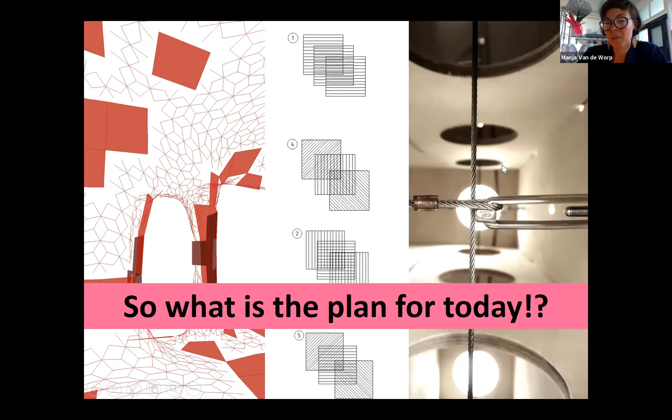I want to really talk about the importance to learn from others and to bring different people together and talk about this collective knowledge. What I'm going to do as well, I'm going to put my timer because otherwise it might last a bit too long. So I'm giving myself 12 minutes for this introduction. And most of you know as well that I miss timers. So now here we go to myself as well.

So this kind of horizontal learning strategy, I find it super fascinating, because vertical learning, as it says here, experiences are cases where a learner makes a lot of incremental progress on a scale from low to high skills, as if moving up a ladder.

So that is kind of the typical learning. You learn a skill, then you improve it, you go to the next phase and the next phase, etc. But then horizontal learning is a bit more like Mario Brothers. You have ladders that go up and down, and you need to actually use all of them and kind of still keep looking sideways.

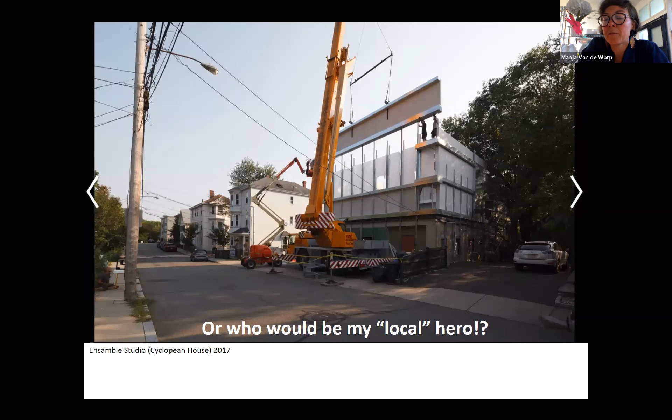So horizontal learning is much more about exploring what these ladders look like and where they can bring you. Horizontal experiences look a little bit like mucking around, and I will show some stuff of that as well. But really they are ways of getting your feet wet, getting used to the water, and getting ready eventually to jump in and go swimming. I really like this idea of thinking, and I also think that is how I work and collaborate, hopefully with everyone around me. So let's see what the collaborators, the secret guests, will have to say to that in a bit.

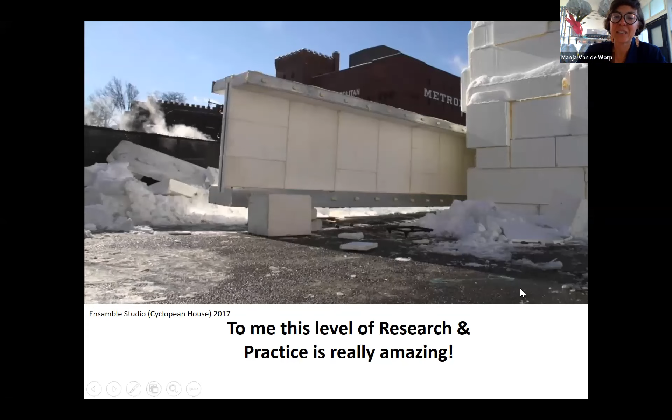So a bit more about me, very simple. Yes, I do structural design, geometry and fabrication, and that has been my passion, since studying in Eindhoven in the Netherlands, where I graduated as an architect and an engineer. But then I also love making and breaking. I like to share crazy ideas and collaborate. And I also like to define a new lightness, which I've called Rubens. And I always challenge optimization.

Then indeed, I teach, or have taught, at AA and Bartlett. At the moment I am teaching at RCA, where I lead the technical studies department for the MA architecture program. And of course at IAAC.

Yeah, indeed, a bit of history. So yes, I used to work for Arup, which was the best breeding school to work with crazy architects, doing really experimental projects. I worked in AGU, Advanced Geometry Unit, and the AT&R, Advanced Technology and Research Department. And then indeed I set up NOUS Engineering London, which is now called YIP. So YIP pretty much stands for 'yes, it's possible,' which is my ultimate attitude to treat all projects.

So what is the plan for today? These are the images that I shared, and these are kind of small snapshots of the stuff that we are going to look at today with these three special guests. But before, I want to introduce a little bit more about what I was thinking about for today.

Because indeed, when Areti was saying, yeah, this is Zoom, we can talk with some cool people, here you see that now we could have all of these amazing architects that we can discuss with, from all over the world. So I was thinking, okay, who shall I actually invite?

Obviously, maybe some of you recognize here Gilles Retsin, who I also collaborate with. This is a kind of fun image of one of our Zoom calls, because we are working on two projects together again at the moment. But that is a bit too close to home.

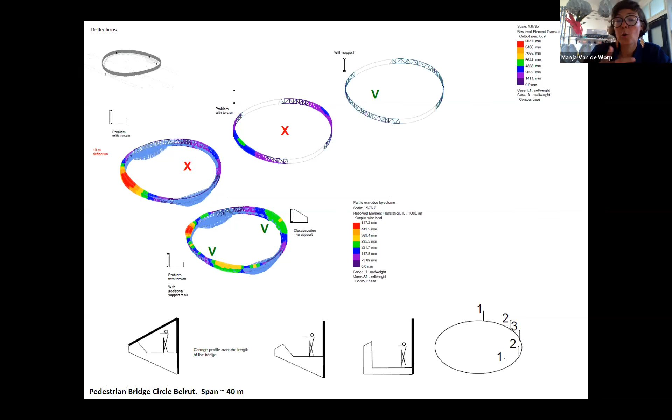Then I thought, okay, why not maybe put someone more local? So this is an image of the Cyclopean House by Ensemble Studio, which is also one of my favorites, because I really appreciate, as you see here in the next image, that they really combine research and practice. I think this is fantastic. I think all of us should get our hands dirty and actually experience at one-to-one scale, but also at prototyping scale, what it is that we are actually designing. And I'm sure that without having their backyard, starting to prototype some of these big I-beams, which you see here on the screen, they would have never just come up with that starting in Rhino. So I think that materials are really, really essential.

But I even wanted to go a bit more local to me and IAAC.

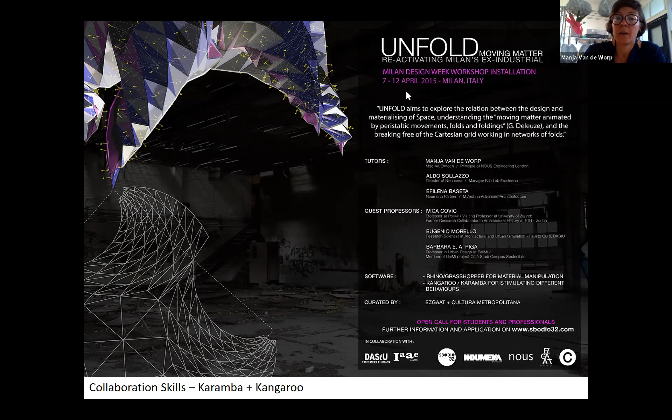I always forget how long it has been, 2013, my goodness. So for this evening, I have invited 3 special guests, my collaborators, to discuss some of our work. We will reveal some insights into 3 projects, all of which have a close link to IAAC. The original projects are funky in form, yet require some form of optimization. Maybe, let's see - food for thought for sure, and exploring a new collective design methodology.

So who are these 3 secret guests? Look, I'm always surprised by all these logos we see in the Google Docs. Oh, Anonymous Wolverine is also here - who is that, right? So you can dream a little bit more.

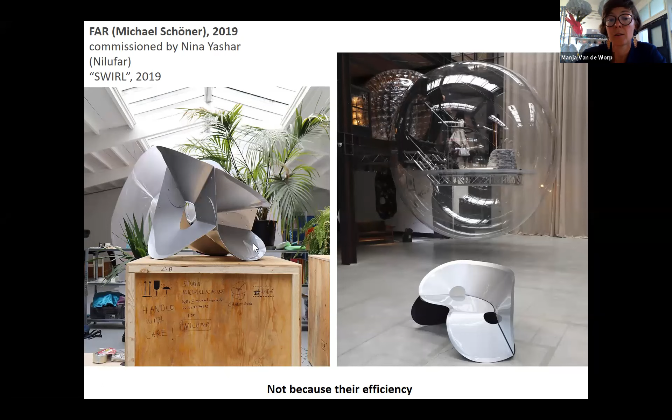I want to start with a bit about my history and this process from 2013 with me and IAAC, but more look at the spin-offs of these collaborations and where they've brought me. First of all, with Areti, I always see her at conferences, workshops around the world, and of course at the best parties.

The start was our road trip in Lebanon, where we were both invited to do a workshop in Beirut. We met together with Luis Fraguada, and the first collaboration started there to work with BAD. We were working together with Ali on this pedestrian bridge, this big circle. I called it a collaboration by mistake, but it was already a really cool collaboration, obviously.

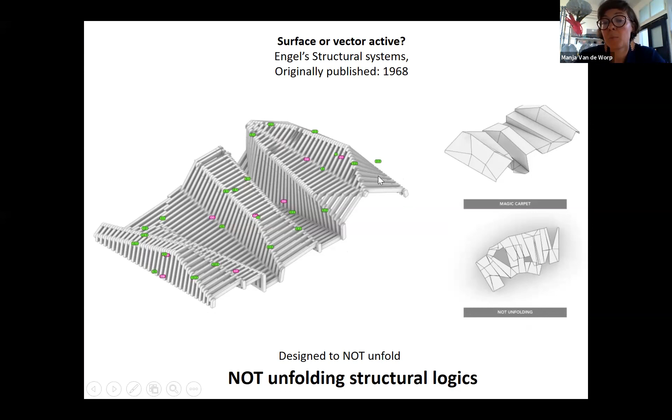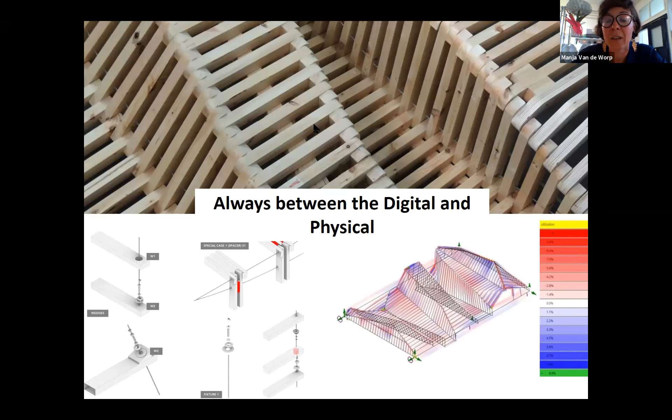Here you see some of the things we were looking at. In my work I use a lot of structural analysis, but it's important to think about how structurally we can actually change potential performance in an architectural way. Is it completely closed? Is it a shelter? Can it become a billboard? Where does the eye line of the person sit, etc.? I do a lot of sketching in Bluebeam, which is just a basic PDF editor, but it's really nice to explore these methods together.

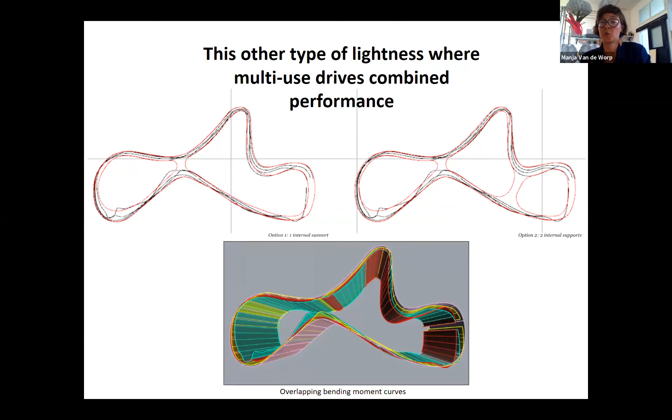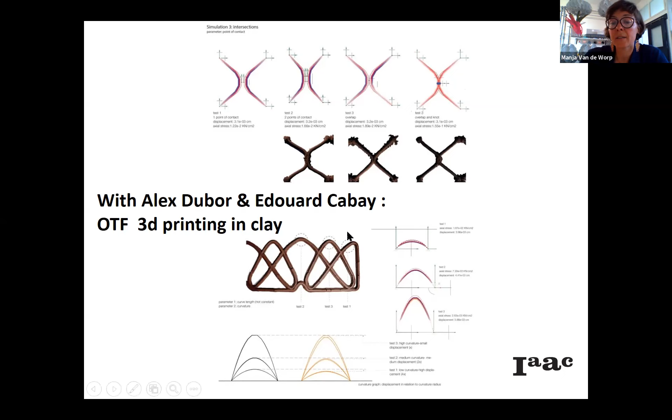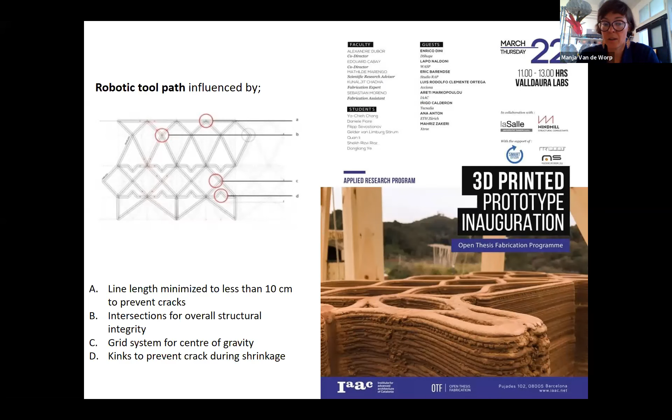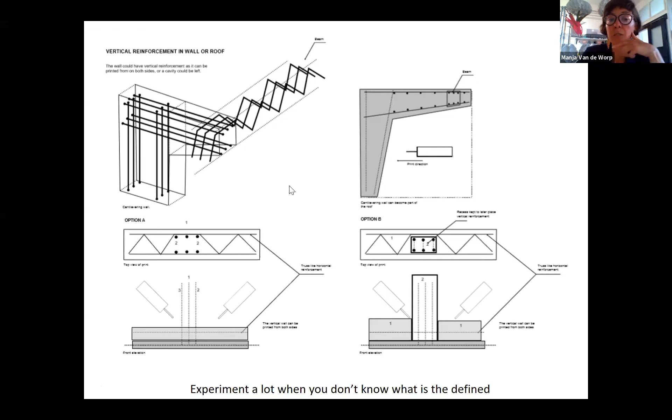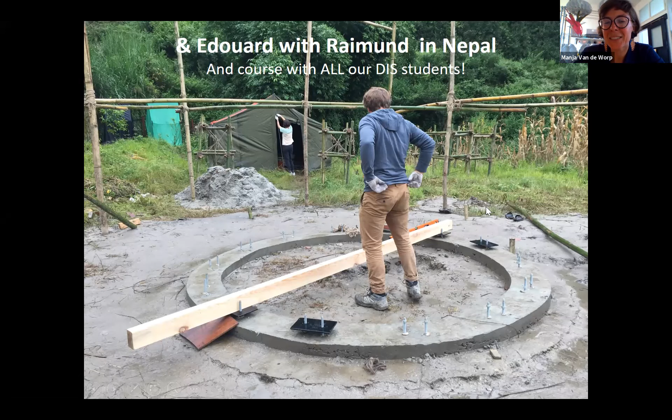What I asked the students was to think about different positions of how to use it, and they actually created an overlay of performances. So instead of optimizing for one specific point, they had to balance and challenge how the different positions would relate to geometry and stiffness within this product.

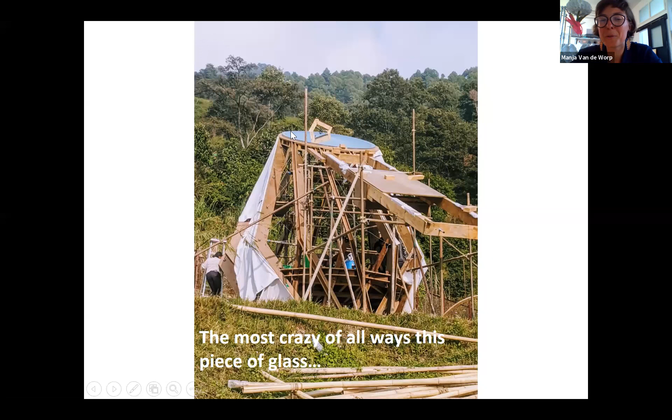Continuing on from that, a lot has come from my relationship with IAAC. I also helped Alex and Edouard with the OTF to think about 3D printing from a structural point of view. We looked at cracking, the curvature of the print, the drying and overlap, as well as testing the material in its wet condition versus its dry condition. The main output is to see how we could inform the robotic toolpath with the information we're getting.

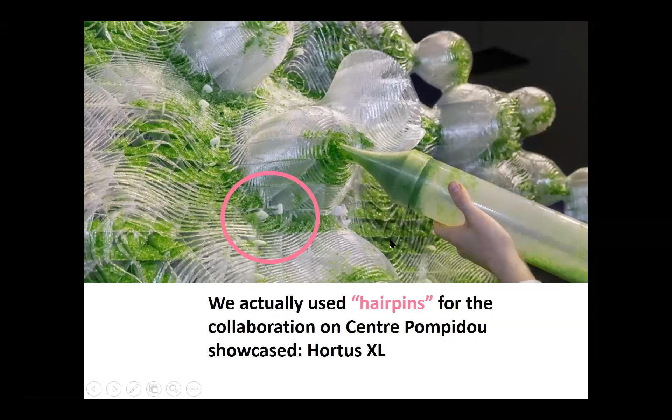And again, I don't know anything about 3D printing. I maybe can imagine what kind of material and structural principles are at play, and it's really about testing these different aspects together. I'll close quickly—I don't know exactly how many slides, but we'll get there.

What's important about this 3D printing work is that I continued with Rob Stewart-Smith, who is at the Autonomous Manufacturing Lab at UPenn, and tried to work with 3D printed concrete. What I think is important is not only the scale, but also that not everything has to be crazy or funky—it's about experimenting with things that aren't yet defined.

For example, we asked why does everything have to be printed—can we just make hollow sections? This is part of a cantilevering wall and beam intersection that would then be filled with concrete on site. It's about printing and casting horizontally, and how we can combine different techniques together. I'm always up for the challenge, but also really to extract and give knowledge, and to further our knowledge through these collaborations.

And of course, as Areti already mentioned, with Edouard and Raimund in Nepal, and all the students doing the Data Informed Structures course—again a bit of concrete, but the project itself is this 6.5 meter timber tower that we constructed. Amazing, and what a fantastic learning experience.

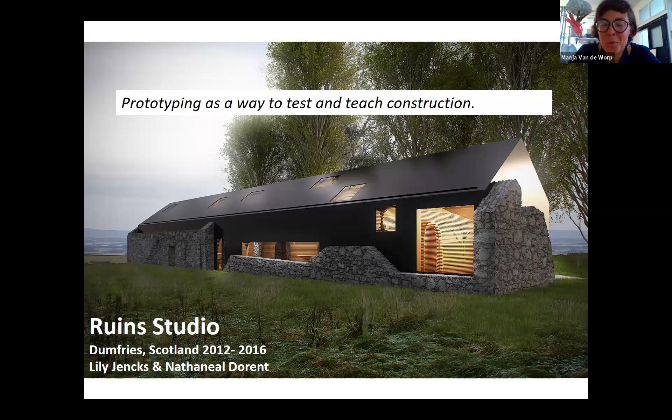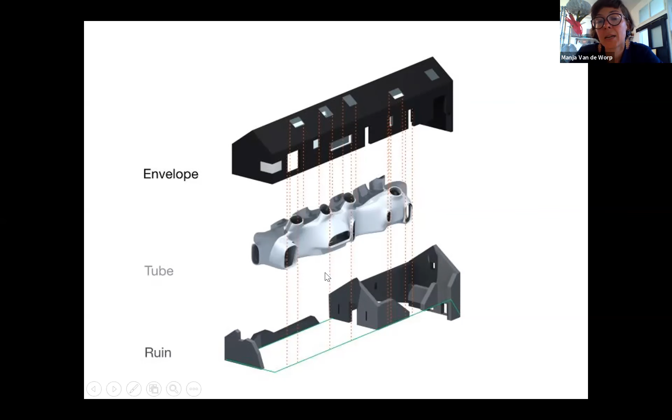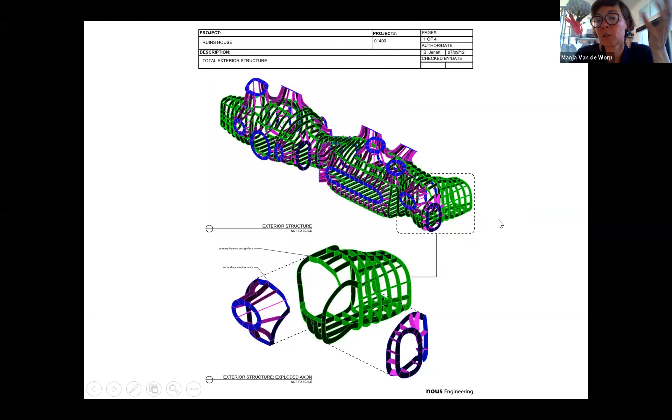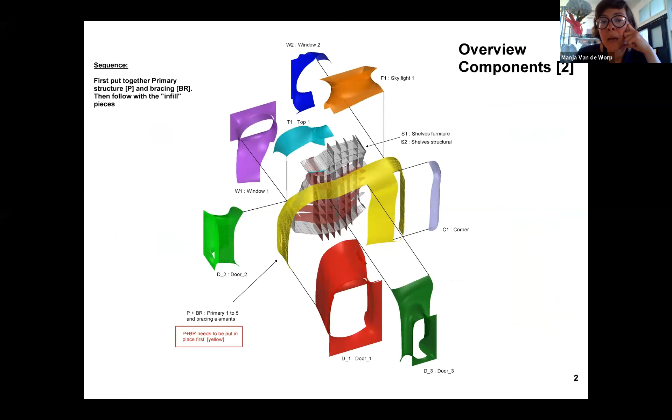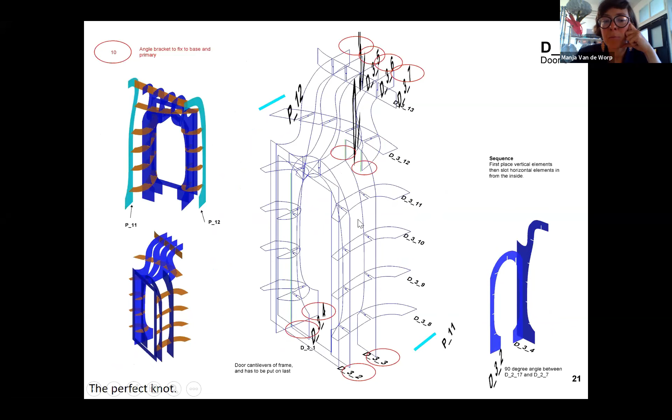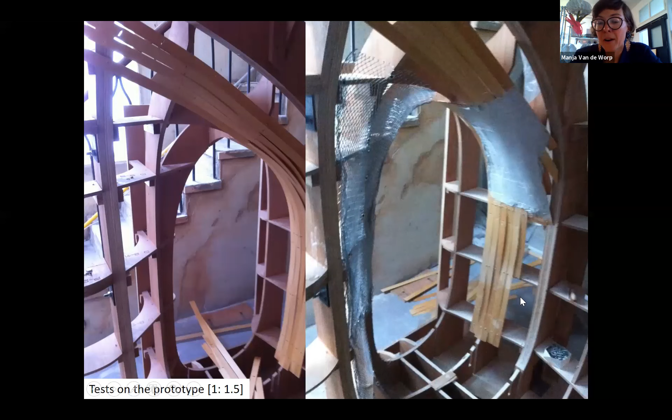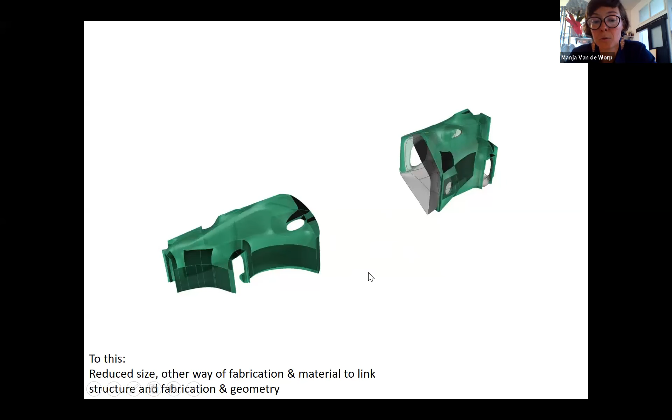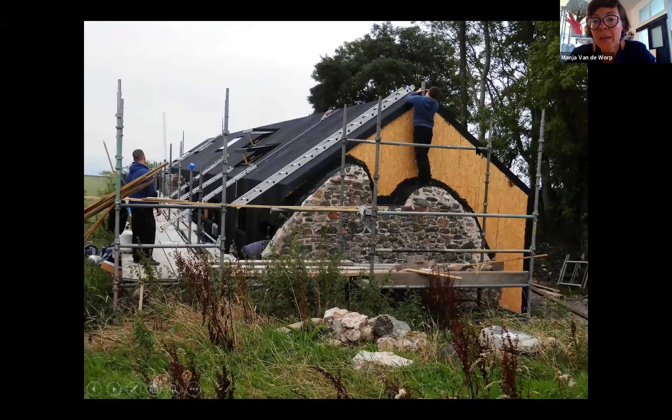What we're going to discuss a bit more today is this inner tube. We have the ruins here, which is the bottom layer - I'm not sure if you can see my mouse - and then we have an external envelope, and internally we have a structure that houses program inside, but also between the surface and the external part.

So here you see one of the first renderings that they made of this. This project started through collaboration with NOUS Engineering, and it came about because Matt's wife was a really good friend - or is a really good friend - with Lily. That's how we got this project.

Obviously, even as engineers, we use Rhino, as you know from me as well. But it's important to think about how the modeling we're using actually relates to a structural approach. And yeah, it looks pretty messy - all the geometries are super messy because they've been created in whatever software, there's no real rules to it. So how can we go about this?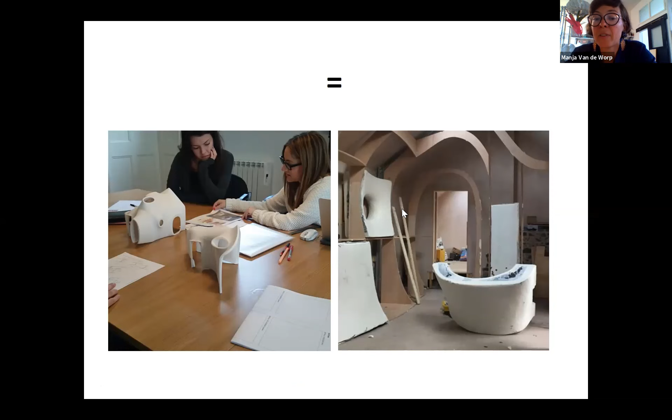Here are some more images of these, and again the main internal structure and how it was created.

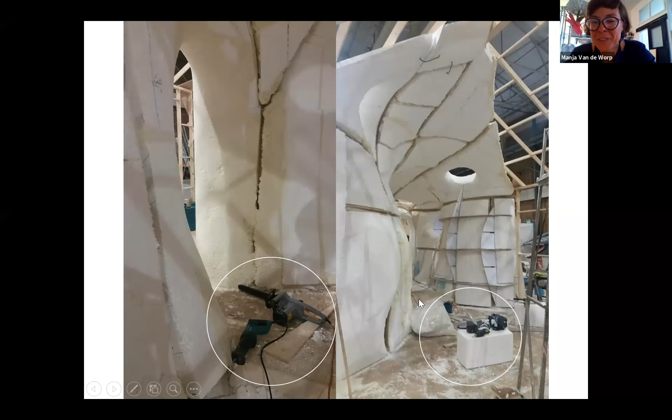But not only that, we made it very messy. We tried to think, okay, on this undefined geometry, how can we actually create some kind of cladding on this? So here you see some of this experimentation.

One more important aspect: in mid-2014, so imagine we're already two years in, we went from this continuous tube to this value-engineered version. All of a sudden we didn't have the full tube, we had to redefine the geometry, and the design had to change again.

So here you see another image of that, and here you see it during construction. You see the beautiful ruins and you see the external skin, and then internally will be the inner tube, as we called it. So this is what you see here.

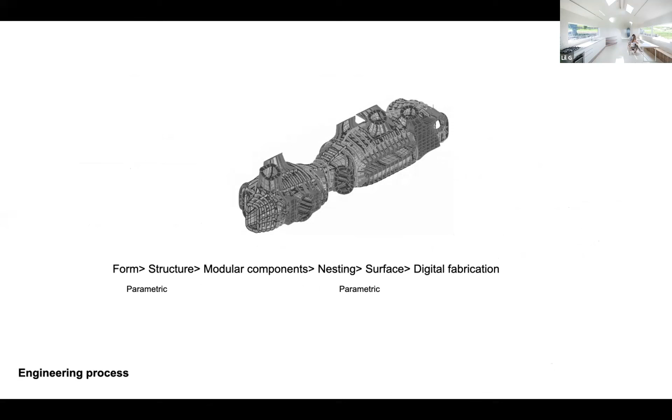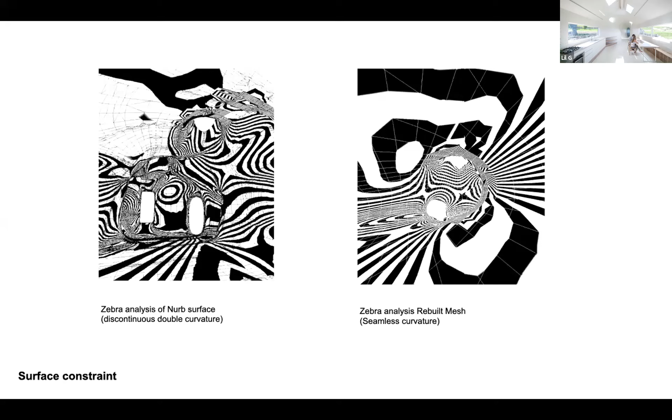So the timber structure was more like a placeholder that would then be rigidified by these infill pieces. And yes, so it used a hammer and a saw to cut and shape all of these beautiful curves here. And this is one more image from the inside, again during construction, because here the fiberglass reinforced plastic had to be dried - we didn't want any seams - and this is a heating gun changing it.

But let's hear a little bit from Lil G about what his interests were within this project. So I want to welcome Lil G to the floor.

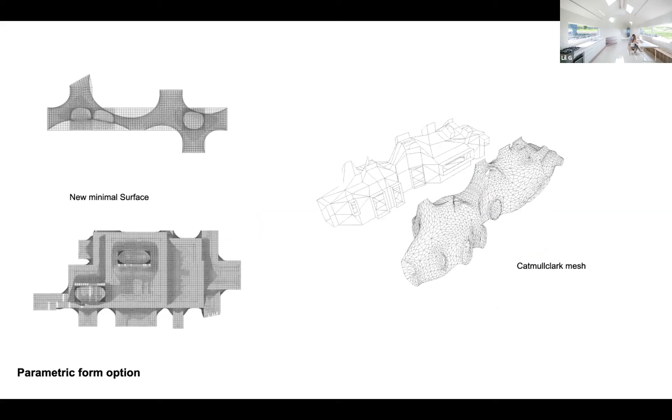I don't know how to do it, but I'm sure one person will be doing that right now, isn't it? I should stop sharing. Perfect, you've done it. And then Lil G, you can go. Hello? Hi. Hi. So, hello there.

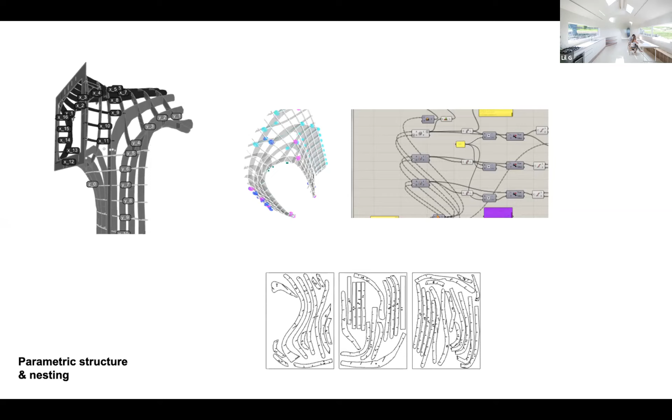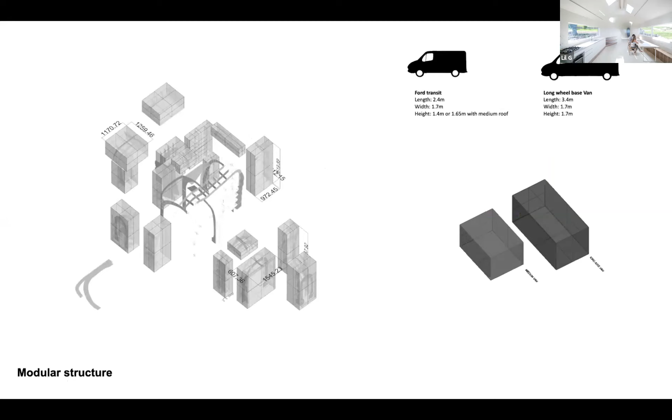We worked on this project about 7 years ago, and it was in a very remote area. So we wanted to work on this prefabricated structure. The fun thing about this project was the internal solutions rather than the external. So as Manja explained, I had this external envelope which was traditional due to restraints of planning, and we had this fun sort of organic form inside.

As collaborators, basically we wanted to redesign this form and structure and surface so that we could design this all parametrically, so that we could create easy flow for construction.

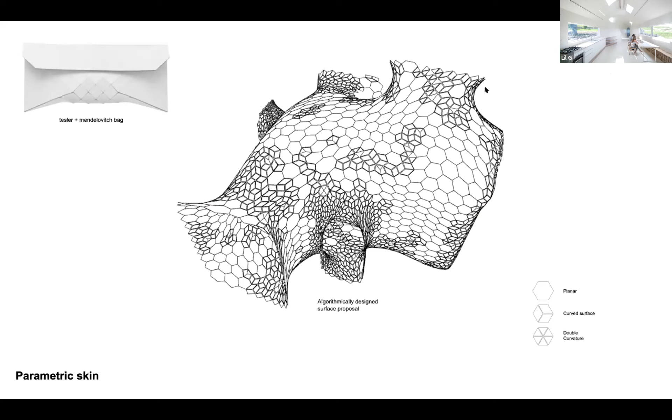Yeah, as Manja was explaining, at first we were giving... Hey Lil G, just so you know, you're not sharing your screen yet, right? I was meant to, yes. Okay, so we didn't see anything at the moment. So you should share your screen. It is again at the bottom, the green tab that says share screen.

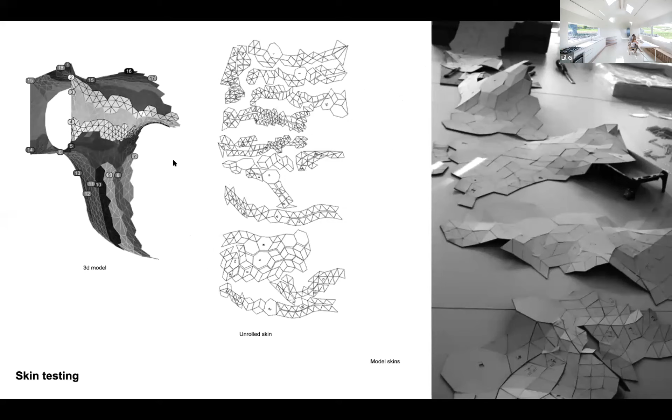Yeah, there we go. Okay, so maybe it would be good to just go flick through it quickly. It doesn't matter. Yeah, so as in you didn't miss much. We're just explaining basically what you explained. But...

So as engineers, I'm going to start again. We're asked to create this continuous flow so that we could easily design different parametric forms for construction. At first, we were given these surfaces, which were NURB surfaces, which didn't allow much play for parametric design. So we had to redesign it using different forms of tools. We played with relaxers using Kangaroo, and also mesh relaxers, such as Weaverbird and so on.

Obviously this restricted the project in terms of space and design, so it was a reiterative process. And we found the easiest methodology was to work with these crude meshes and then sort of relax that. So the client would design the space and we would reiterate.

Once that was solved and we had these continuous surfaces, we could create these waffle structures algorithmically, and also create points where structure was important. So, for example, on the left, you have an important node where all components were coming together and tying in everything. We would create quick prototypes and also do everything in modular systems, considering the remote location.

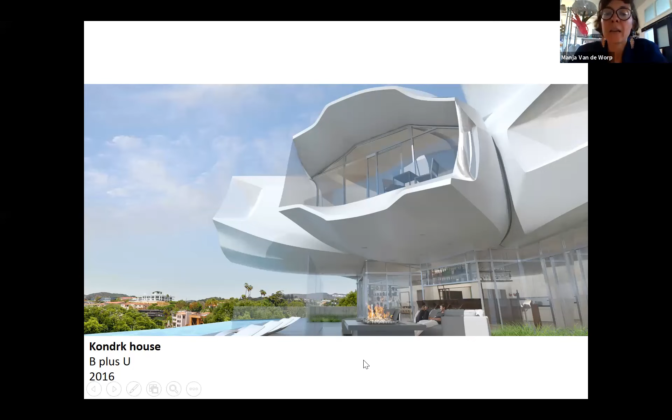However, due to time restraints and economic reasons, we had to postpone this idea. So we went on with designing the structure and envelopes so that they all fused together, and these were the results. The waffles we designed were also integrated within the furniture and the structure, which was cladded according to the design intent.

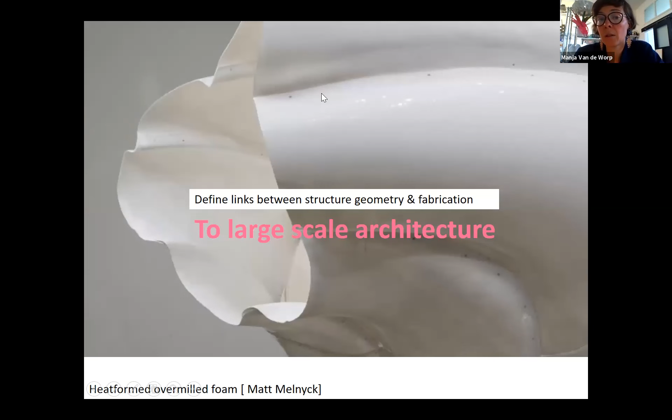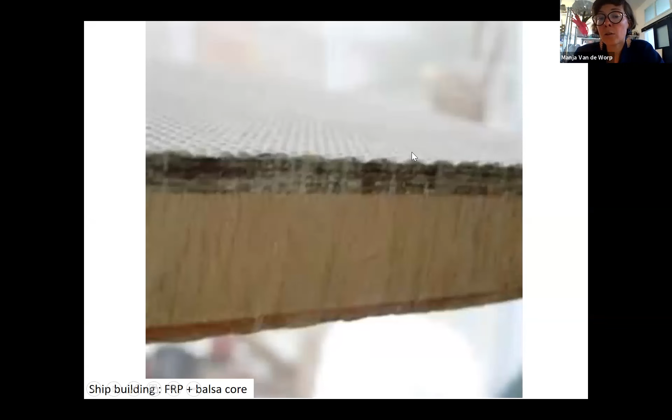Amazing, Lil G, woo! I will clap for you. I know everyone else is clapping as well, but I think we can do the shared clapping at the end. Thank you so much, I think it's really nice because you're highlighting the geometric aspects, and how nowadays we might think we can just do that, but it still doesn't really work at this scale, and when we have to really define the structures.

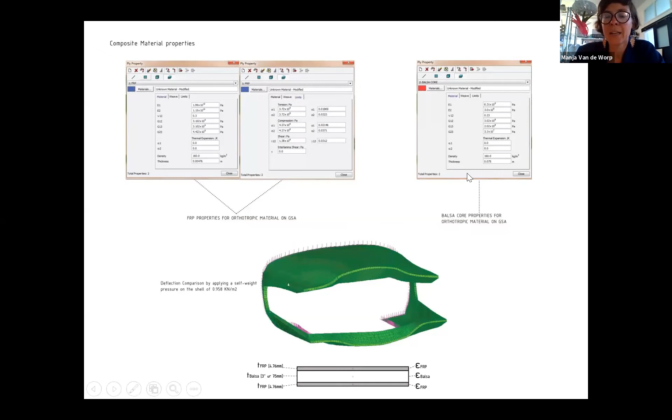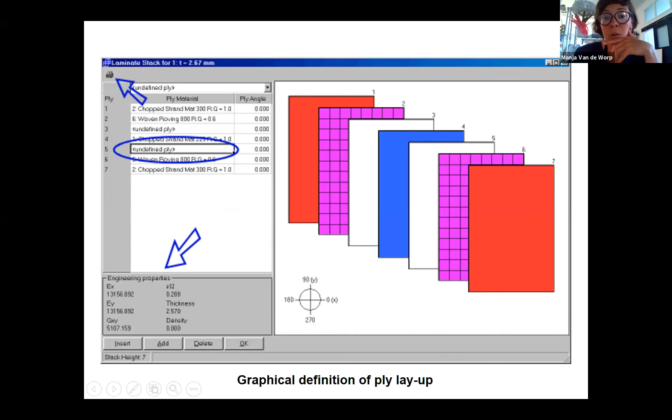But there's something very special about this man, because the first time for a meeting where Lil G was already ready on Saturday to keep going, Elinge said it's raining, so yeah, I decided to work from home. I will never forget that, because now in this period it's kind of normal to work from home, but when you're collaborating and working together, it's essential to be in the same space.

Using a lot of sketches, I think this is really good to communicate, to try to explain what will be happening, and definitely also when you're still trying to figure out stuff. So the second project is Kondrk House, a house in Los Angeles designed by B+U, and we did this together in 2016.

We did this again together with NOUS, and I just wanted to say hey to Matt, Liz, and Omar, maybe you guys are here as well. What was really interesting is that Matt had already been doing some sculptures with B+U, and then it was really about how can we transform and bring this kind of super freeform style language to a bigger scale architecture.

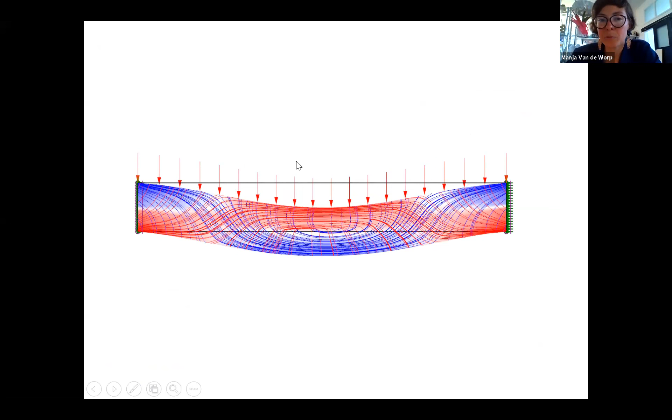Oh, I'm trying to move to the next slide, yeah it's just very heavy, sorry. How can we actually bring this super freeform style language to a bigger scale architecture?

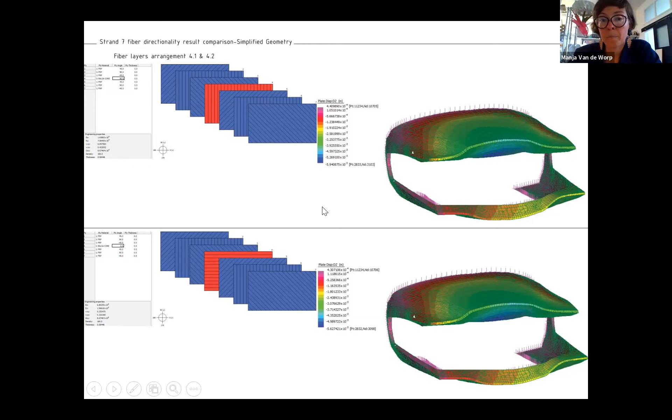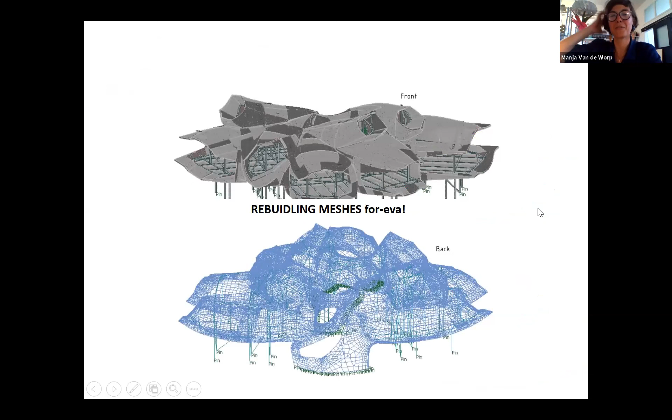In this case, we started working with the fabricator from day one, using FRP, fiber reinforced plastic, in a sandwich construction that has FRP on the outside and balsa core on the inside. All of you must remember this little kind of airplane material. Balsa is super light, and it can also be quite easily bent. Then we have two layers of fiber reinforced plastic on top.

So what we had to do is transform this kind of layering that doesn't have an isotropic behavior, meaning it has different properties in different directions. We had to first model the behavior of the material to make sure it is correct in relation to the actual behavior of the material, and then incorporate it into the design.

It seems to be a little bit slow at the moment. We use this famous software called Strand 7, which is amazing for laminated composite capabilities. It's quite funny because they're actually showcasing a violin. It's amazing for meshing, but it's absolute DOS.

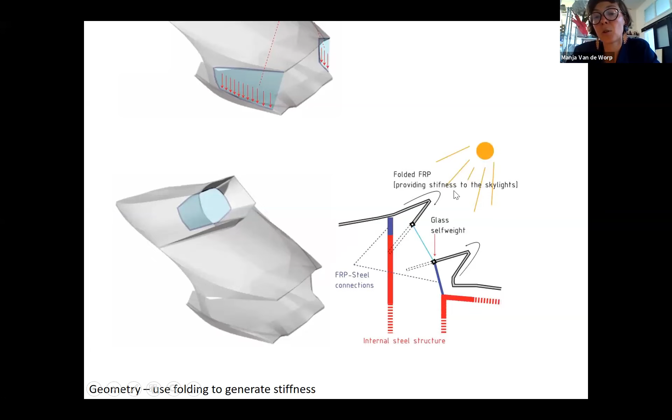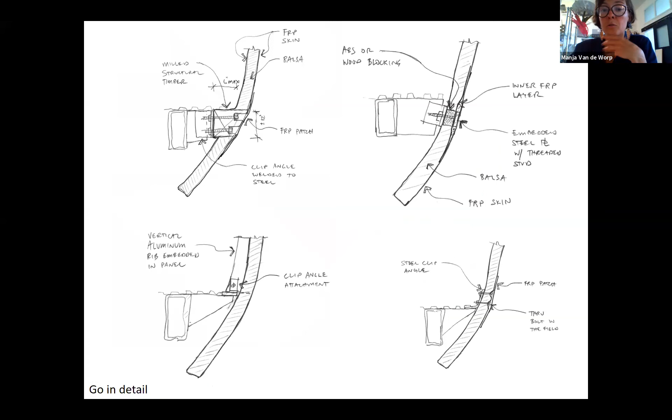So this is an interface on how you might be layering up - a graphical definition of a ply layup. We had to also get into how we could work between Rhino and GSA, another kind of engineering software, together with this software that could give us much more detailed information about the fibers. So we are trying to model and deal with all these structures or geometries that we would get from the architect and model its behavior.

So that is the other image I showed, because I thought this was quite characteristic - we had to test the relationship between curvature, structural behavior, and the orientation of the fiber layups of the FRP, how many we need, what would be the depth of it, etc.

Now we're like, yeah, we're just going to do some force flow analysis. But obviously changes in direction really have a big effect on how the structure would behave. And also you cannot do everything super bespoke - you still have to think about the fabrication process, which panels will be made, etc.

So I just wanted us to be reminded of this lovely software we always use in my class, which is Karamba, which can show the principal stress lines, as in this case, but in some cases it's also very hard to read. So it's really important to capture behavior.

Trying to move to the next slide. So here you see some of our tests of different orientations, also of the timber main direction, etc. We really tested all the impacts of the different layers and tried to get a feel before saying, yes, we are doing the final analysis.

Okay, I'm trying to continue again. And some more of these images here. Yes, we had to rebuild meshes forever.

So what we had to do is explode the whole mesh and analyze each one of the parts of the whole structure, and how to attach it to the main steel structure. In doing the wind analysis, it wasn't that much of a weight analysis; the wind took a really important part of the analysis, as the form is completely different to what we're used to.

So we had to run some tests in different programs, and it was really interesting because this made me realize the level of detailing I had to do and use before achieving the best structure possible for my projects.

Currently this helped me, because now I make projects starting from the architectural design, I also do the structural design, and most of the time I also build them. So this project made me realize the complexity involved in the whole process, and how you need to realize, even if you're not the one building it, or doing the architectural design, or the structural design, that someone needs to use your information to make that project happen and come alive.

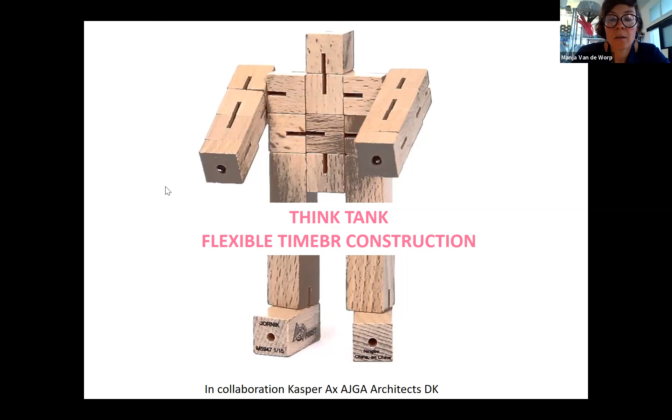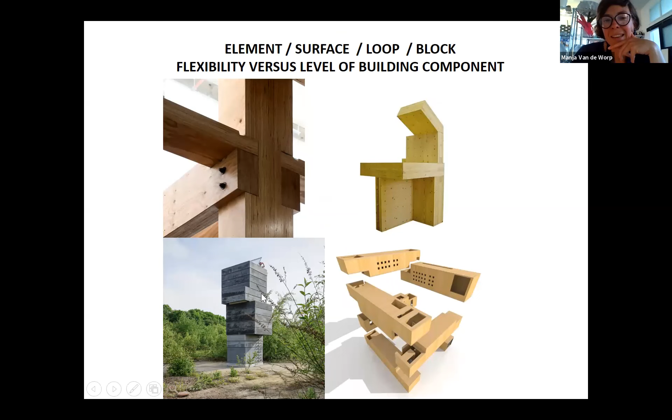Okay, I am going to finish with this. Sorry everyone that I couldn't make it and had to send a voice message. Here in Mexico, with COVID, the government just gave us a green light to continue with construction and all the architectural and engineering works. So I'm like crazy, I was planning to connect but we only realized this today in the morning, and I had to make a lot of changes. The schedule here in Mexico is 7 or 8 hours earlier than you guys, so it's the middle of my day, but I would love to be there.

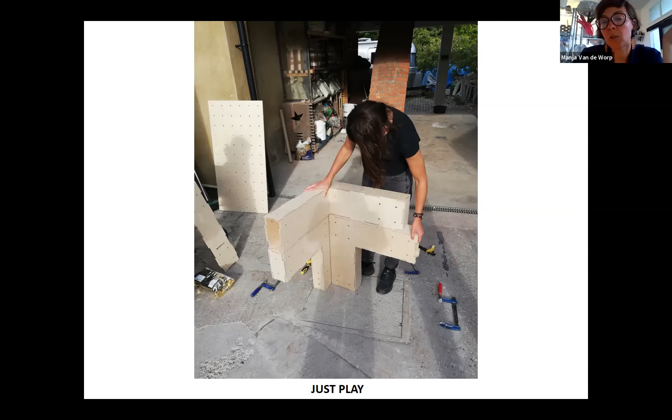So we are going to continue with our last amazing secret guest, who has been asked to be called John Doe. He's always capturing hearts, and no view is too high.

So I'm going to discuss two projects here. One of them is the result of this think tank. I started with an image showing all the people on a big line, students, engineers, fabricators, architects, and John Doe was also involved in that.

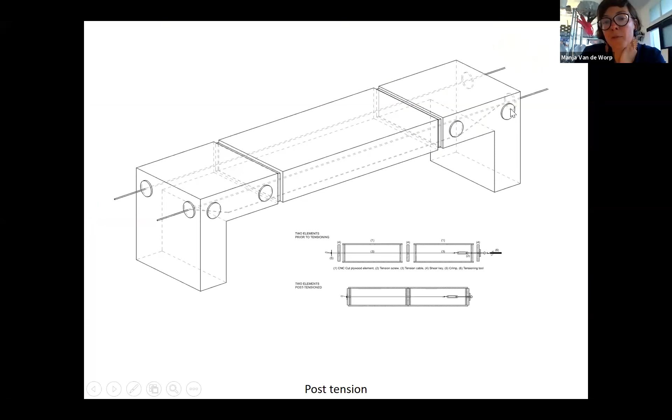Apologies, because every time I try to move to the next slide it's very slow. So I am not sure... ah, here we go. So this think tank is the result of us looking at timber construction, flexible timber construction.

So, for example, we even asked the members to start looking at a kind of toy to get inspired on what flexible timber construction means, and how we can think about elements, components, parts, and what is actually the definition of flexibility, how flexible do we need something to be.

It's just very slow, so I'm apologizing. I don't know what to do.

Some of the collaborators here are Matt Murphy, who I actually met at Shape to Fabrication, and he leads Maas Bespoke, which is a timber product development company and works for Bouwman Lyons architects.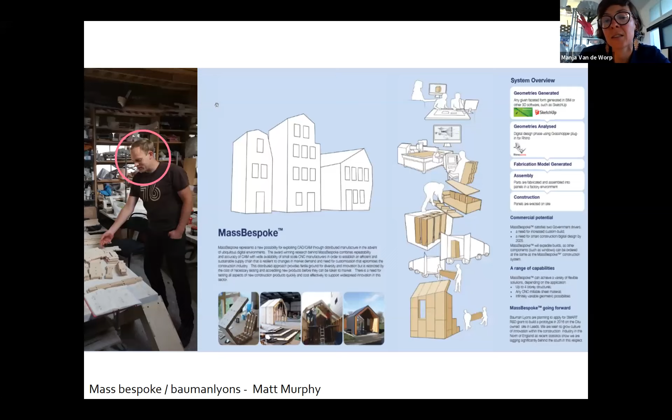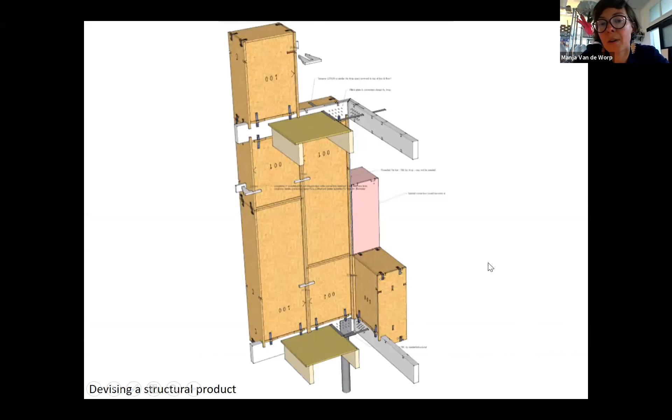So I wanted here to highlight with these different colors that people have different skills, different backgrounds, and these were the ones that we put together.

And what was important about this curation, together with Casper X and John Doe, is that we allowed everyone to play. It was not like, just make something. No, actually, let's try and see what we really can do. So be really free and use this environment to kind of create.

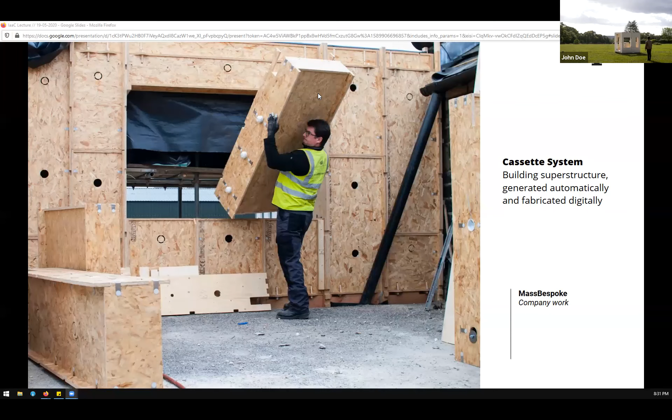Here you see again a familiar face, Raymond. I think it's important to know that we had students and also professional architects and engineers involved, and the teams were made to cross-fertilize on their skills and experience.

They came up with something quite cool, which is this kind of post-tensioning system. I'm sure Joe will go a bit more into that as well. So I will just continue here with more of these models.

So this system of cables was post-tensioning all of these elements together, and that is what you see here. Obviously we test-built it, which was part of it.

What was important is that we immediately went to the one-to-one scale and used our specific tools, as you see here, which is a rebar tie wire twister, in order to post-tension the cables inside. So cheers to everyone.

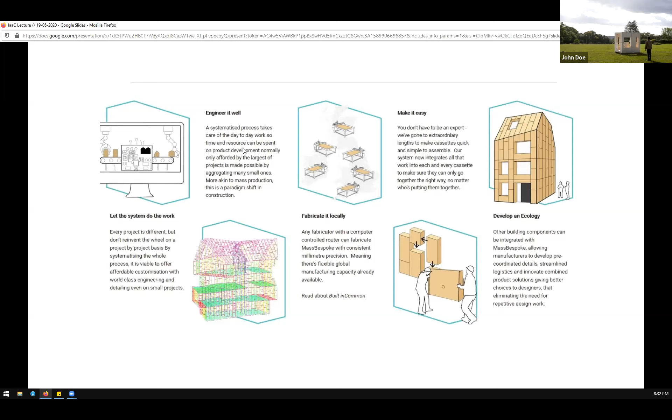So we actually disassembled it and used it again, but also IGA architects - we worked together on this project which is called Minka. We developed another, let's say, less prototypical system for housing. So how could all of this work together?

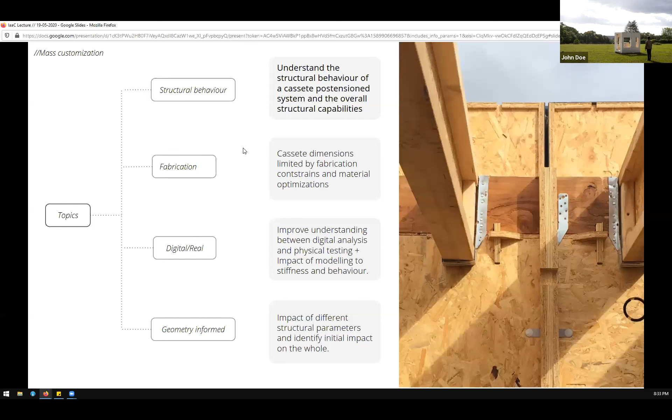Maybe we look here at the structures that have been on tour, because people have taken forward the project that we built. But what is important, I want to just quickly go back to Matt here, Matt Murphy from MassBespoke.

So actually they're building this kind of cassettes. He's very acquainted with using the laser cutter, the CNC mill, and building these cassettes. And also together with John Doe...

We then had the liberty to assist them from a structural point of view to make their product better and to understand some of these aspects.

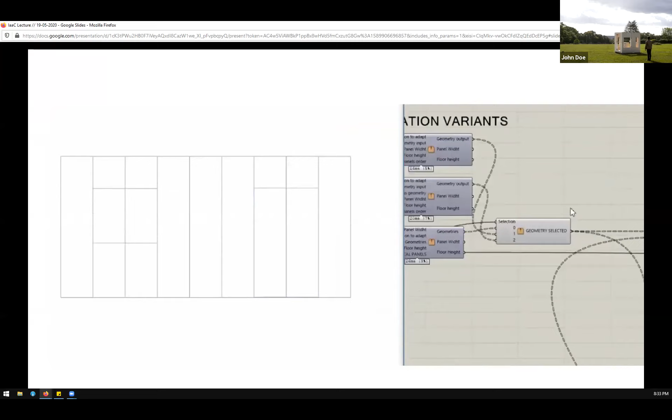Again, what is important to realize is that I know Matt Murphy, again, from Shape to Fabrication, and we helped him develop and assess the structural aspects of these cassettes. Here you see another image of that.

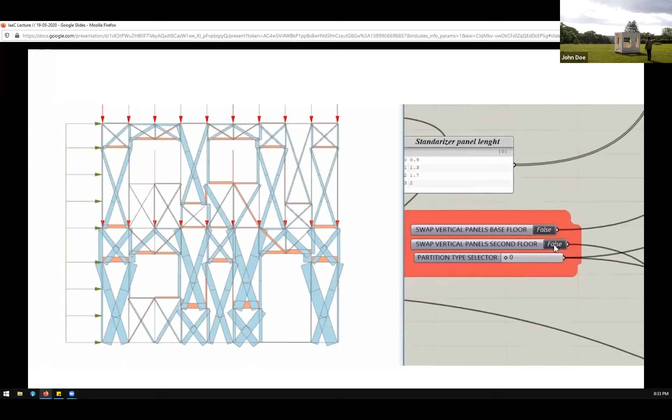And here some crazy Excel output of all the testing that we have done. Obviously this requires the help of a great collaborator.

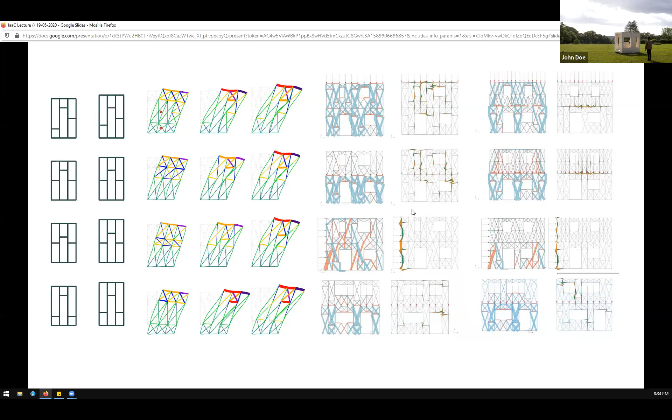I'm going to explain a little bit about the secondary project that Manja explained. That was about mass bespoke and how these systems can inform the construction industry, and how digital tools, and especially collaboration, as Manja stated, in all the levels between digital to traditional making, can benefit the construction industry.

This project was developed, as the name states, as mass bespoke — how to customize mass production. With a simple system, like this cassette that has just a rectangular shape, we can build multiple types of buildings at multiple scales while keeping a lot of flexibility in the construction compared to traditional mass prefabricated building styles.

To explain the project overall, they embed a lot of different tools. Since the beginning they use simple tools, so people can start designing. They want to embed their users with using SketchUp to design their houses in some way, involving an automatic beam system and always thinking about fabrication to reduce and cut down time.

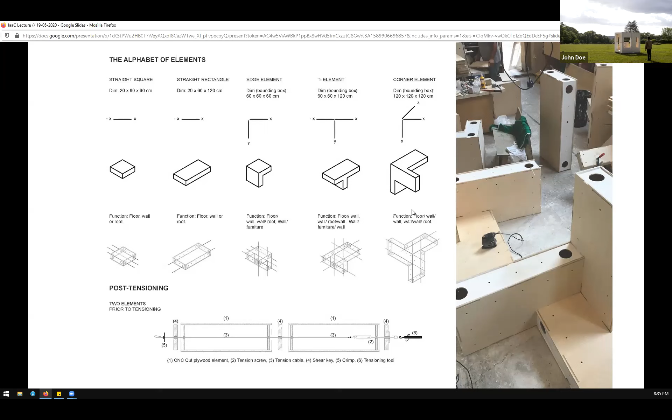That's when Manja and I went in to inform and optimize the system from the structural point of view. One of the complex points of these systems, once the base system is simple — just a box — is how it outperforms when assembled together. It behaves completely differently, like it's not just a simple Lego brick. There are a lot of wind forces, structural loads, moving charges you need to think of.

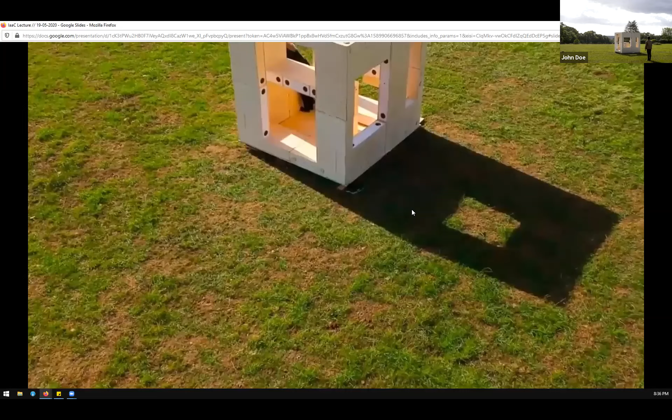This is, for example, how collaboratively this project is built. You can see millions of tools that are all related to each other. In this case, we just went through the structural analysis ones.

We assembled some parametric models to test out what could be the best perfect fitting of the cassette, always thinking of economy, fabrication, and the most important point for us, which was the structural point of view, and how the shape of the cassettes would inform the performance of the whole structure.

We assembled a whole system that we tested with your lovely class tool, Karamba, and we later compared it to professionally graded and certified programs like SCIA, to test the validity of the working tool and to see if the results we got from one program and the parameterization would actually behave the same way in reality.

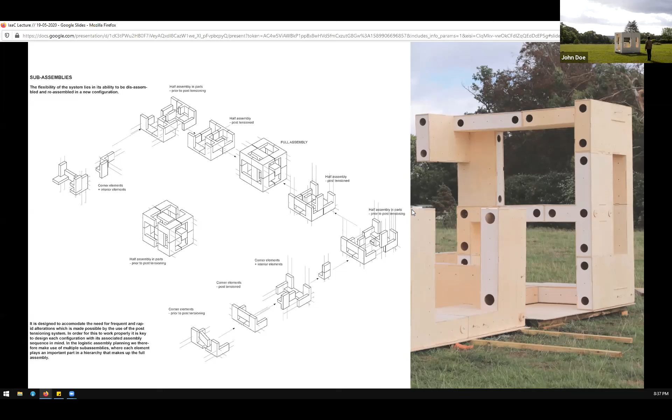We ran a lot of tests, and later we embedded some machine learning to try to optimize the process, so we wouldn't have to manually take all the time to go through the multiple combinations.

Now they've actually built and assembled some houses with it, a system that behaves entirely with post-tension. And that's where the research and the think tank we call End-State came through.

This workshop, the think tank, was initially thought of as: what can be built for flexible housing typologies? That couldn't be done, as Manja stated, without a lot of work. We spent a lot of days just brainstorming, thinking — one of your lovely professors here — about how the shape could be developed into simple enough structures and systems that could allow multiple combinations and combinatories of pieces.

To allow that, we ended up with an alphabet of elements, combined together with a post-tensioning system that we simplified to allow a lot of fabrication and testing, because we spent half the time prototyping and half the time brainstorming. We fabricated it in just a few shots.

So we can build this kind of flexible housing typology. Right now we live in a society where everything is changing all the time, we don't have permanence, we're moving constantly, different work, different jobs. So we can build a new housing typology — or not really new — it's more about how we can refurbish the housing typology to match our new needs.

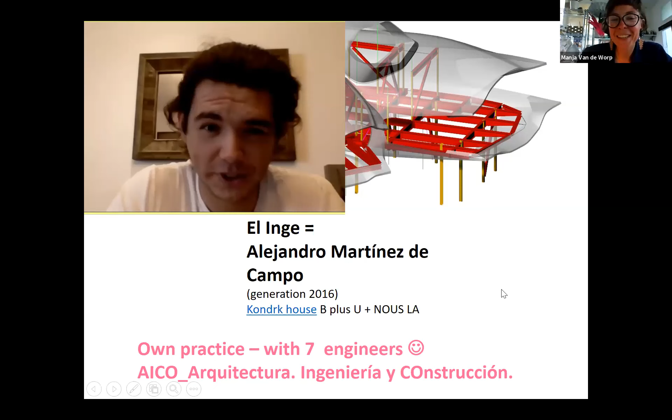What is this kind of flexibility? For example, the 3-point corner pieces are a very different way of structurally cutting up elements that we normally put as a beam and a column. So we really thought about a combination of change, structural elements, architectural elements, post-tensioning, etc.

I think it's very nice to show how the think tank, the last project, really links to the first one that you showed, which is the mass bespoke cassette structures.

Okay, I will resume with, I think, three more slides for which I am going to go share my screen once more. Obviously my final duty is to reveal.

So we had these three people, and I'm sure that one person really understands already what this image is about. Super massive thanks, right? It has been really great to hear from you guys, and to go into this together and share our joint experience.

The first person I want to reveal is El Inge - El Inge is Alejandro Martínez de Campo. Maybe some of you remember him. He is actually an ex-student at IAAC, and he now has his own practice. He is a Fab Lab runner, and is into showing the more conventional world what we can do with these amazing tools. Alejandro, thank you so much.